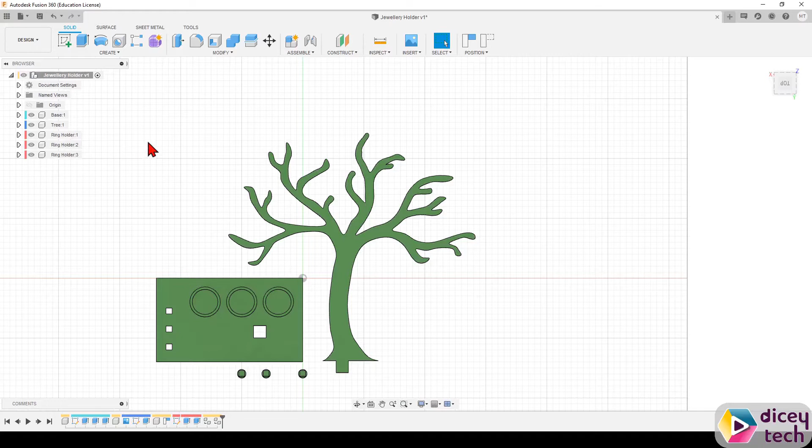So for the final part, before we export everything, you want to check that your tree is good. You can see that here, the line is quite thin, meaning that when you print it out, it may be weak, and we want our tree to be strong.

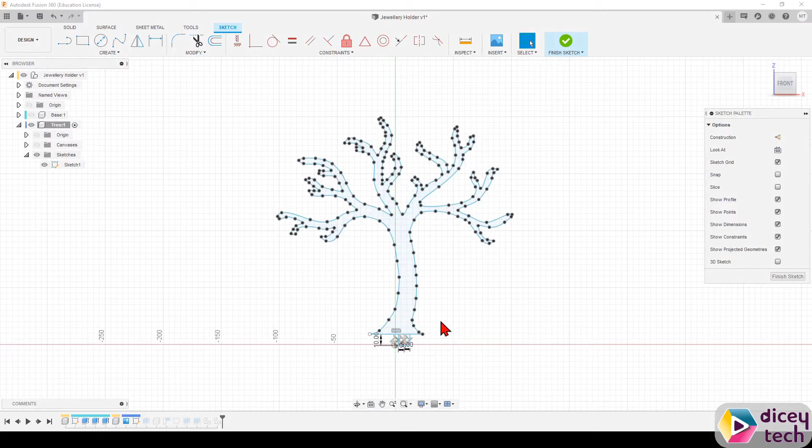So to fix this, you want to go to Sketch, right click, Edit Sketch for the tree, home page, front view, hide the base. You can edit this, so we can make some of the parts that were too thin thicker, like here.

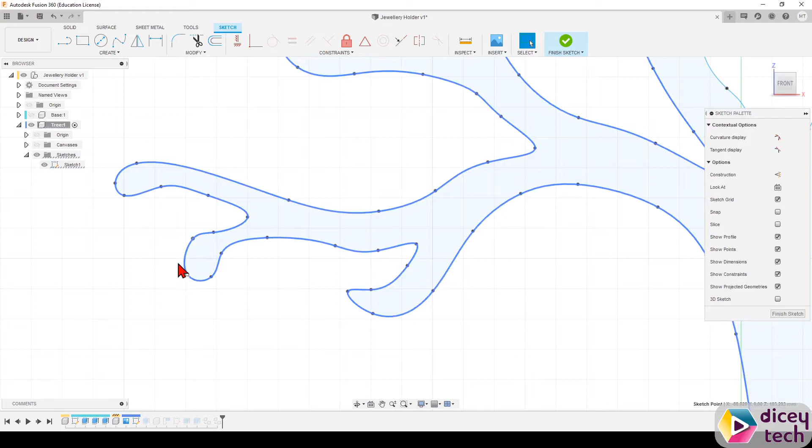And this part here, you want this to go up. Otherwise, if it's down like this, it's kind of pointless, because if you hang something on it, we can just adjust this one, make it go higher, so we can hang something on it. So like this.

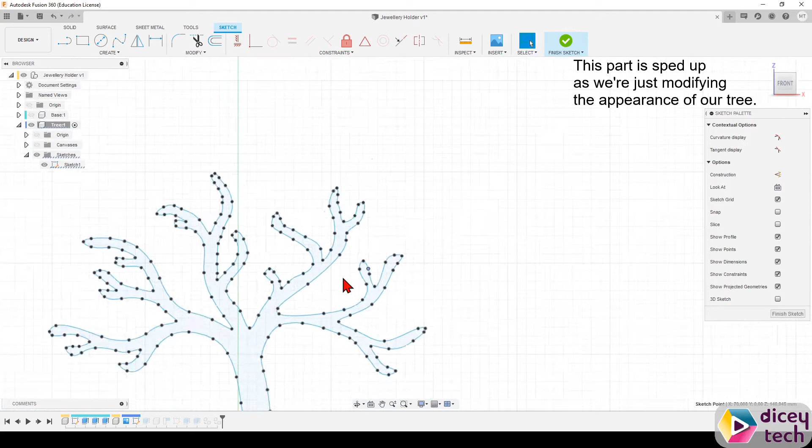Then check up here, that looks a bit funny, so we can fix that by just moving the dot really. Then click on Finish Sketch, and your tree should be edited.

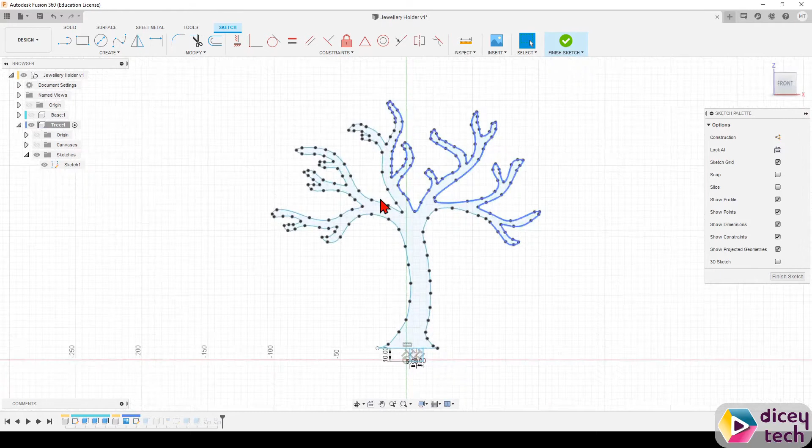So that looks okay. Here, still too thin, so we go back again. And that part was right here. Like that. This corner too. Like that. And this part here.

We want it thicker, but we don't want to make it too thick, because then it won't look natural. So give it some sort of curve when you make it thicker. So like here. That should be good. That's much better.

So now for the final part, we're going to put all of these together to see what it looks like. So go to Joint up here, under Assemble, and then you want to select this corner right here. If you look from the top, it'll be the bottom right corner.

Right there. Make sure it's vertical, the little circle over there. Once you select that, you want to go into the base. If you're looking from the top view, it'll be the bottom right corner right here. And make sure this circle here is horizontal.